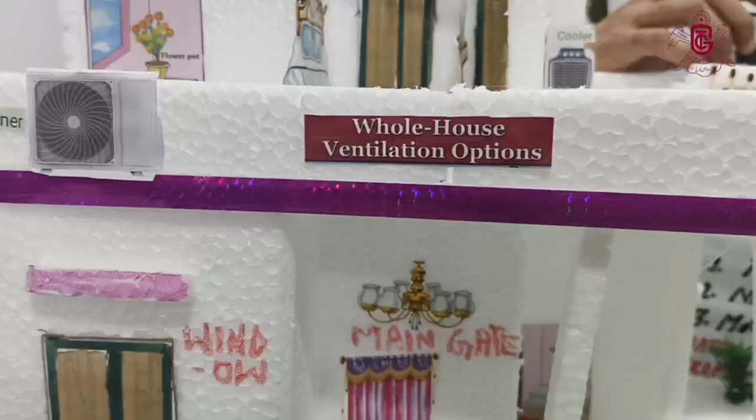We are going to demonstrate a model on whole house ventilation options, which was given by the PSM department under the guidance of Professor Dr. Tanveer Alam Sir, Professor Dr. Talat Nahid Ma'am, and Professor Dr. Malka Baland Ma'am.

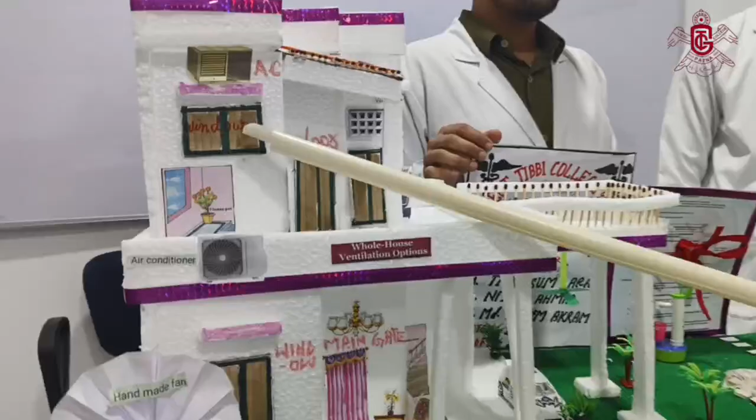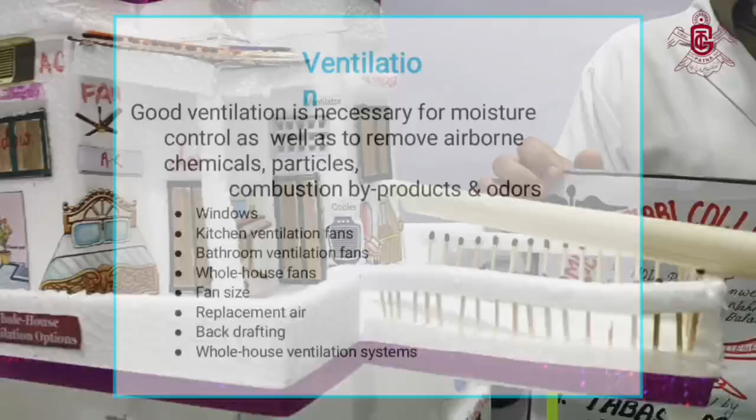Here we have discussed ventilation. Good ventilation is necessary for moisture control as well as to remove airborne disease, chemicals, particles, combustion byproducts and odors. First, windows. Second, kitchen ventilation fans. Third, bathroom ventilation fans. Fourth, whole house fans.

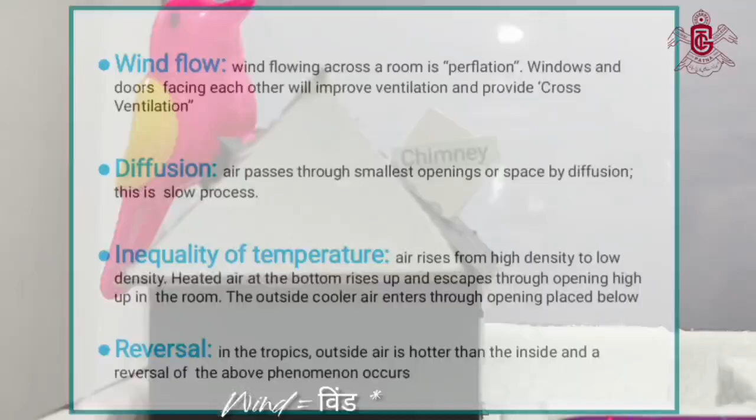Fifth, fan sizes. Sixth, replacement air. Seventh, backdrafting. Eighth, whole house ventilation systems. Then we have to discuss wind flow. Wind flowing across a room is perflation. Windows and doors facing each other will improve ventilation and provide cross ventilation.

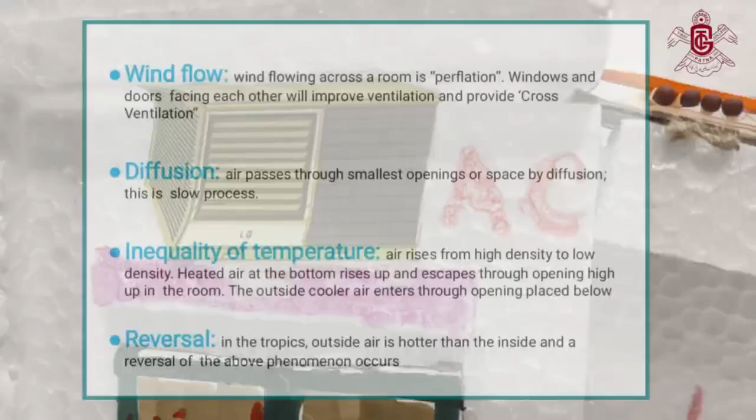Second, diffusion. Air passes through the smallest opening or space by diffusion. This is a slow process. Third, inequality of temperature. Fourth, reversal. Use of ventilation. First, the physical conditions of temperature, humidity and movement of room air. Second, by use of ventilation, smells and odors are removed from the room.

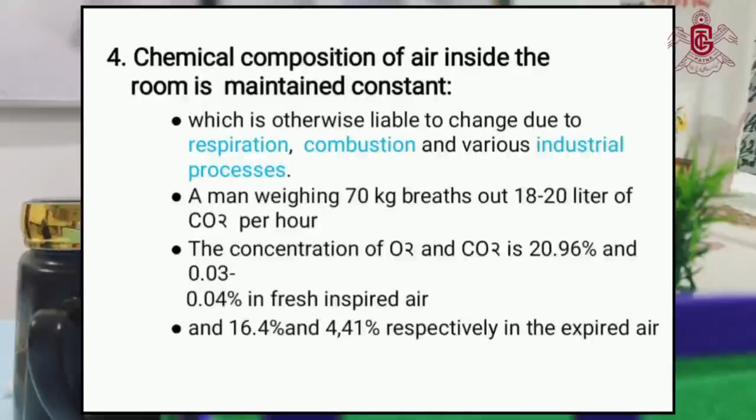Third, by use of ventilation, bacterial contamination in the room is reduced. Fourth, by use of ventilation, the chemical composition of air inside the room is maintained constant, which is otherwise liable to change due to respiration, combustion and various industrial processes. A man weighing 70 kg breathes out 18 to 20 liters of CO2 per hour. The concentration of O2 and CO2 is 20.96% and 0.03 to 0.04% in fresh inspired air.

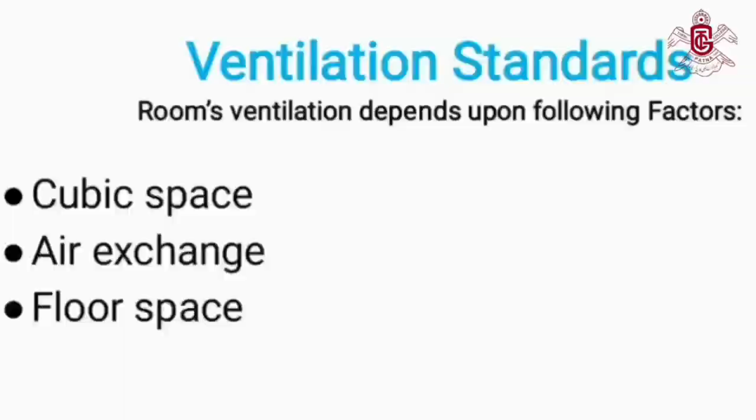We have to discuss cubic space. First, standards for minimum fresh air supply range from 300 to 3000 cubic feet per hour per person. Second, this is no longer followed. Floor area and air exchange are more important. Second, we have to discuss air exchange. Then we have to discuss floor space.

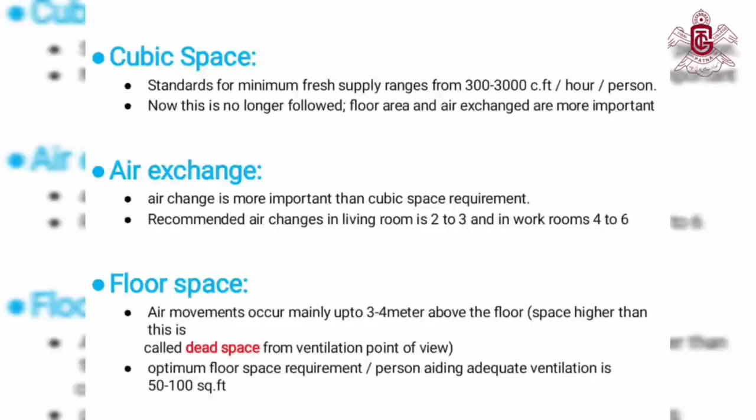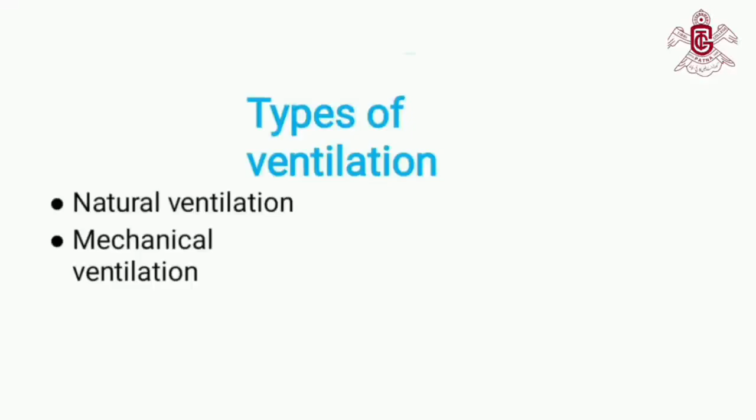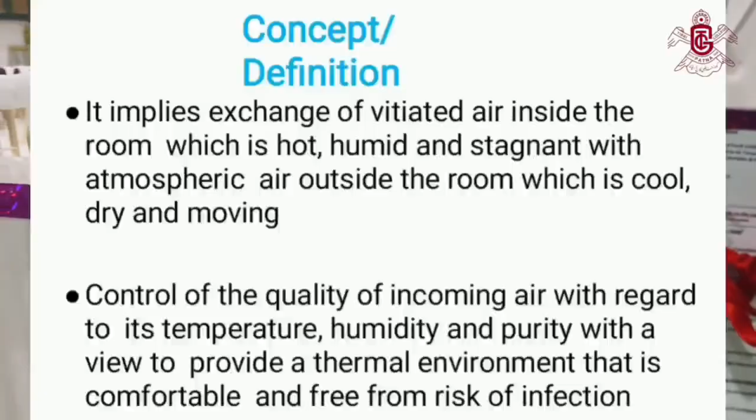First, air movement occurs mainly up to 3 to 4 meters above the floor. That is, a space higher than this is called dead space from the ventilation point of view. Then we have to discuss types of ventilation. There are two types of ventilation: natural ventilation and mechanical ventilation. Concept of ventilation. First, it implies exchange of vitiated air inside the room, which is hot, humid and stagnant, with atmospheric air outside the room, which is cool, dry and moving.

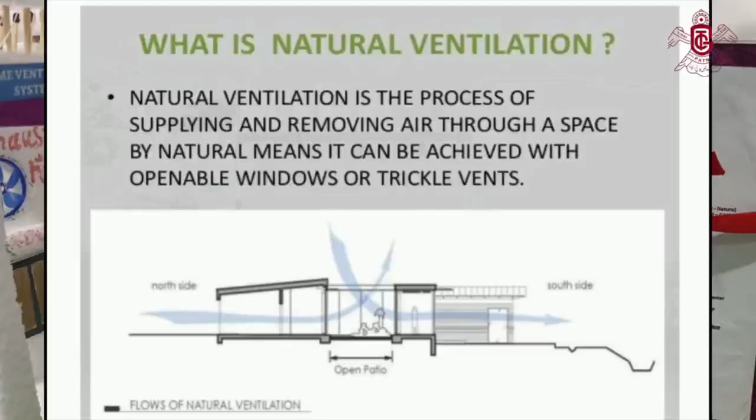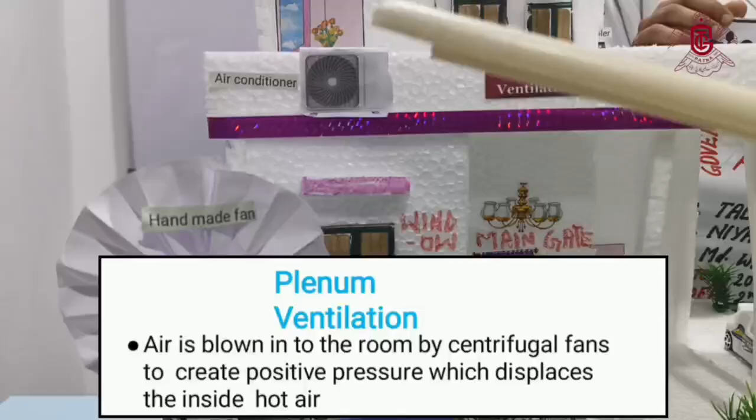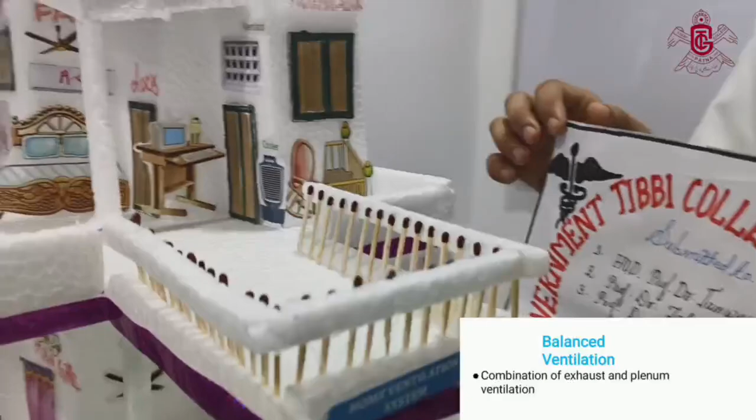Here, natural ventilation is the process of supplying and removing air through a space by natural means. It can be achieved with openable windows or trickle vents. Plenum ventilation, that is, air is blown into the room by centrifugal fans to create positive pressure which displaces the inside hot air. Balanced ventilation, that is, a combination of exhaust and plenum ventilation. Recommended floor space per person in India: adults residential 5 square meters, schools space per child 0.8 square meters.

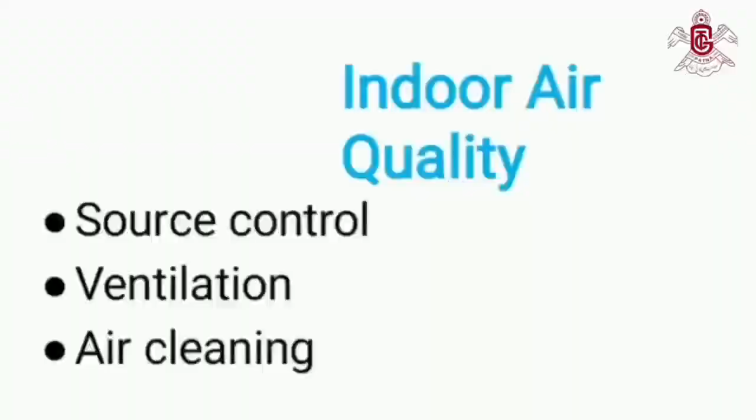Indoor air quality. First, source control. Second, ventilation. Third, air cleaning. Causes of ill effects. First, old views. Second, Leonard Hill, 1914: discomfort by physical changes like rise in temperature and humidity and stillness of air. Disease transmission: transmission of airborne infections, that is, droplet infection.

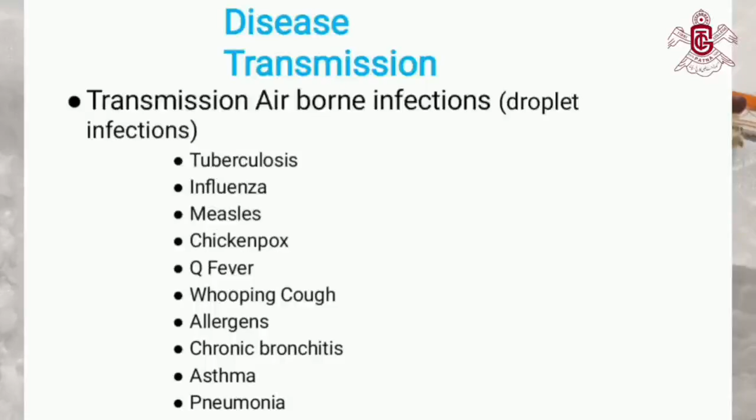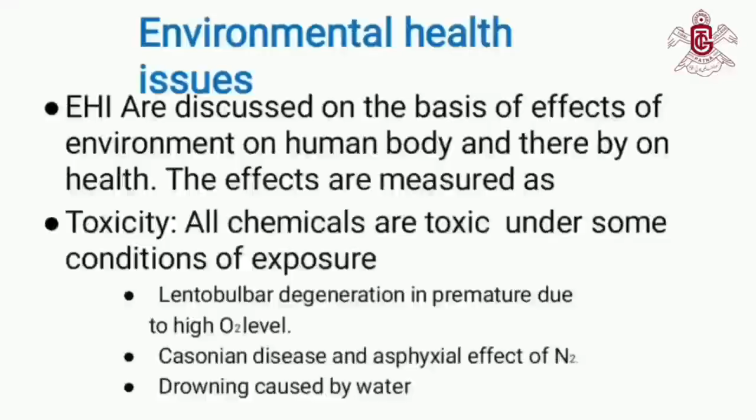Environmental health issues. EHI are discussed on the basis of the effect of environment on the human body and thereby on health. Ill effects in congested rooms: first, discomfort. Second, restlessness. Third, nausea. Fourth, vomiting. Fifth, irritability. Thank you everyone.